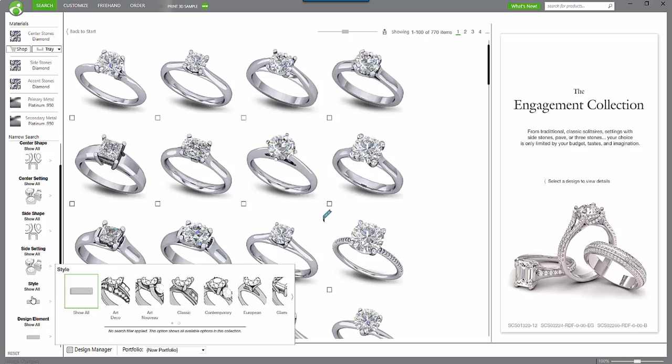Okay, so first of all, we're going to go to the engagement ring section. I want to go down to the styles, and I'm going to select a vintage style. I'm going to select this guy here. As you can see with this particular piece, we've got quite a busy looking piece, pretty much encrusted in diamonds, which is a really good example to show.

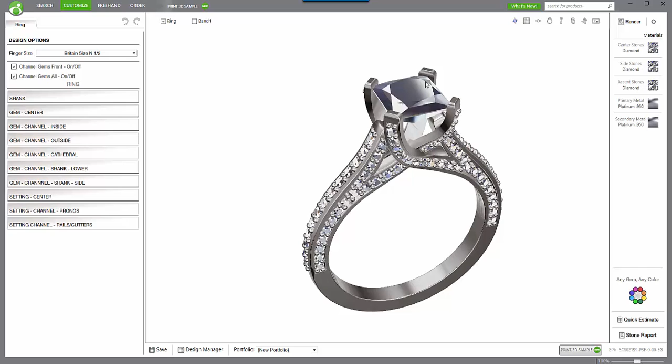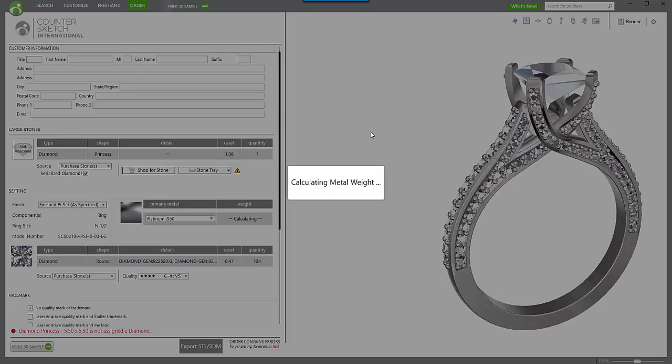You can also see that we have these claws holding the center stone in, and what I'm going to do now is go to my order button, and we're going to export this particular piece. Once it's finished calculating the metal weight, then we'll move on to selecting the particular options we want in order to export this piece out.

So we're going to click on the Export STL 3DM button. The window that comes up is going to give us all of our options here. I'm going to select Extend Prongs. That's going to be pretty important. So it's going to prepare the design there.

And when we just move the design around a little bit, you can see that what it's done is extended all of these prongs around these small stones here, which is obviously fairly important. You want a little bit of meat there when it comes to setting all of those small stones.

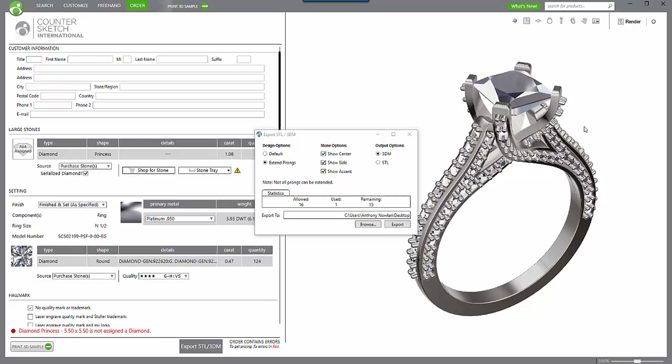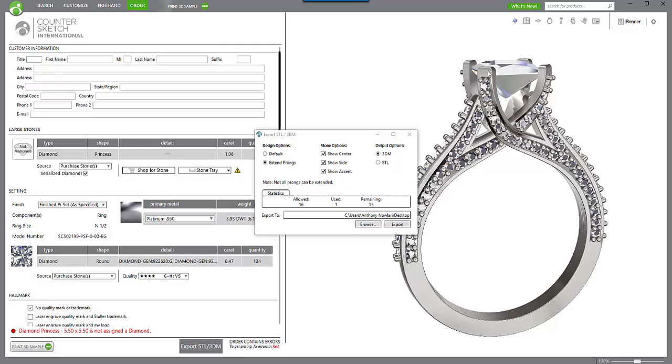But what it hasn't done is actually extend these claws around the center stone, and that's pretty important. The reason it hasn't done that is it sees these particular areas as actually part of the ring, not claws themselves. So this is a perfect example of when you'd need to go into a software program like Matrix and extend these manually, which is what we're going to do now.

We're also going to select all of our stone options, so we want to check all of these boxes here. For this particular option, I'm going to select the 3DM option because we are going to be doing a little bit more work to it than what we would normally do. Once we hit browse, we're going to browse where we want the file to go to, and we're going to hit export from there.

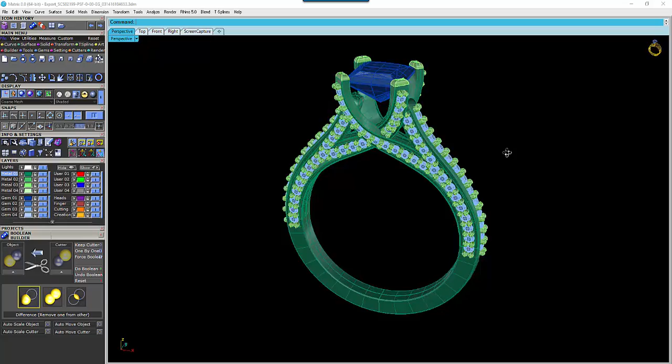Now that we've opened up Matrix, you can see that our file is here, all ready to go. What we're going to do first is make sure that the ring itself is ready to be booleaned together. Now, a boolean operation is when you cut or join or get the intersecting pieces of any particular two or more poly surfaces, and that's what these are here.

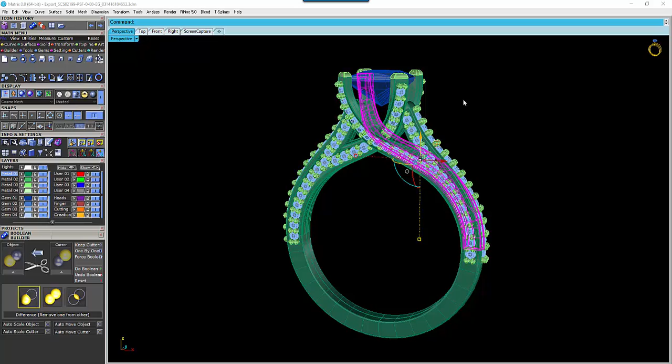When we click on each one of these, we can see that they're all individual, and this is very indicative of what happens when you export a 3DM file. The reason it's really quite handy is that if you need to do some modifications to this particular file, it's much easier to do that to a 3DM file rather than an STL. STL is generally speaking going to be one mesh, and you can't really do a lot with a mesh. Your options are really quite limited.

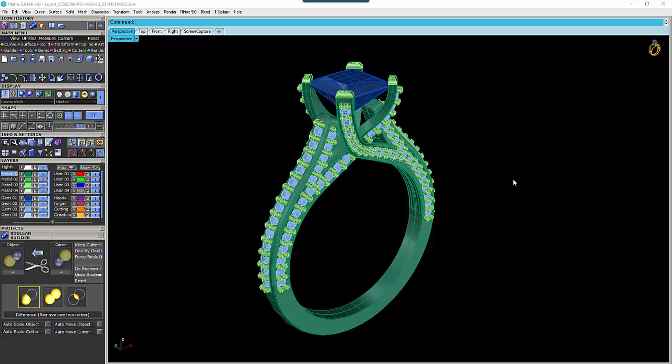So what we're going to do first is turn off all of those gems, and we're going to have a look at what the actual file is. So if we select all of these guys here and pop them into the object window, we're going to get this window here saying some of the objects are not valid. So we need to have a look at that and see what's going on there.

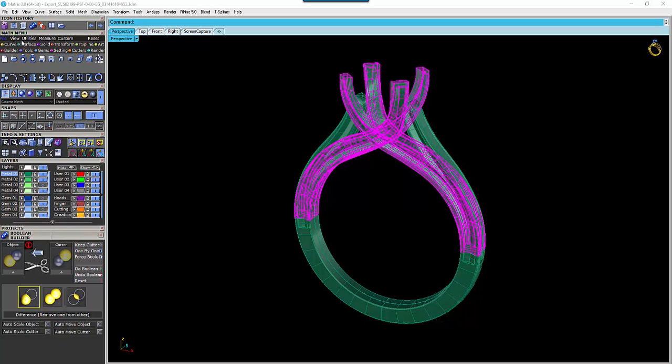I'm going to go to the Utilities menu and select Show Edges, and we can see here that we've got some naked edges. Nothing really unusual with 3DM files, most files do have those at some stage or another. So to fix those, it's really pretty easy. We're going to hit Join Two Naked Edges and just select the edges here.

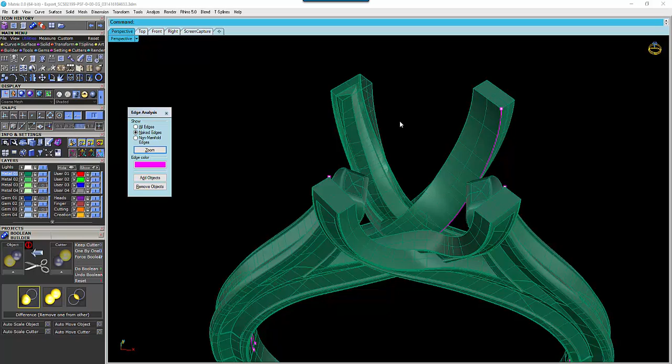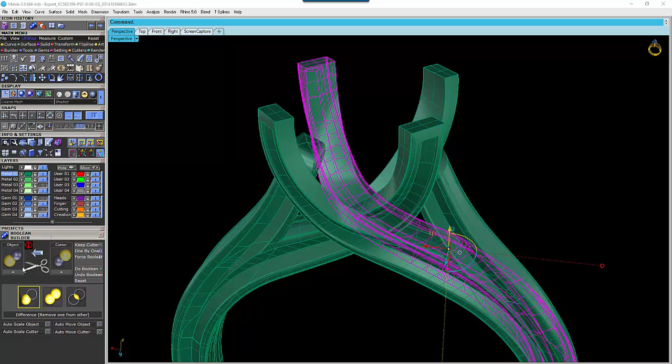This here is just a shading anomaly, so we can just select all of that, hit explode, and then hit join again, and that's all good to go. So now when we put those in there, we're going to get the green tick of approval, which is great.

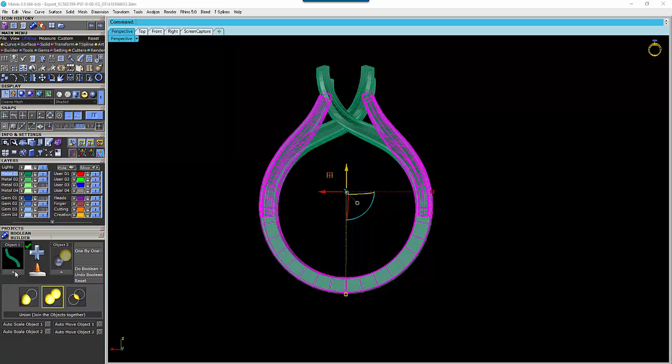The next thing we want to do is make sure that these are all joined together. So we're going to move across to our Boolean difference, Boolean union. We're going to select those two there, put them into that object window, and select these four here into that object window, one by one.

Force Boolean and Boolean those all together. Okay, so once that operation has finished, which took about a minute, that's all one solid piece ready to go.

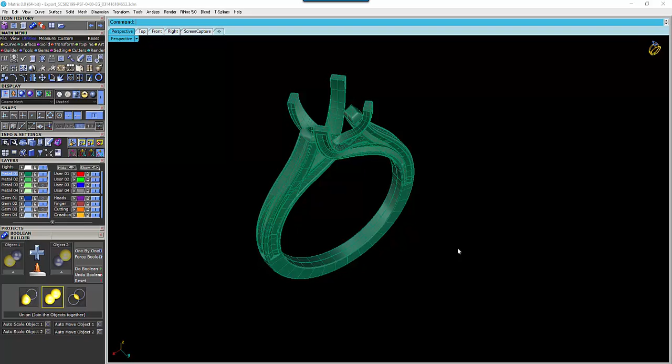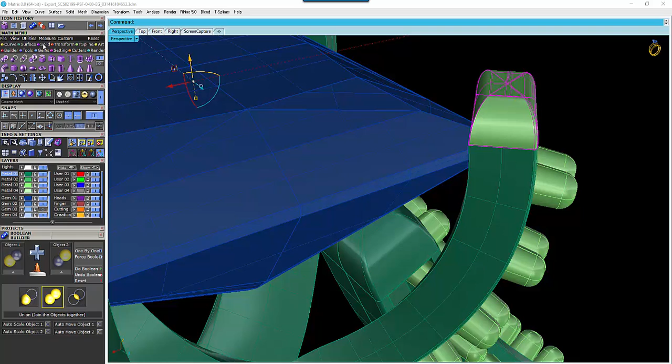Let's bring back all of our prongs and our claws. First thing we need to do is, when we bring back that center stone, we can see that we've got to extend these claws up a little bit. So we're going to select each one of those, and we can see here that they are not capped. So we're going to cap those by going into Solid, Cap Planar.

Now that they're capped, we're going to go into the appropriate window there, and use a tool called Transform, Scale 1D, select an area, and just scale that up. We're going to extend it up to however much meat we really want on those claws there, so just taking those down a touch.

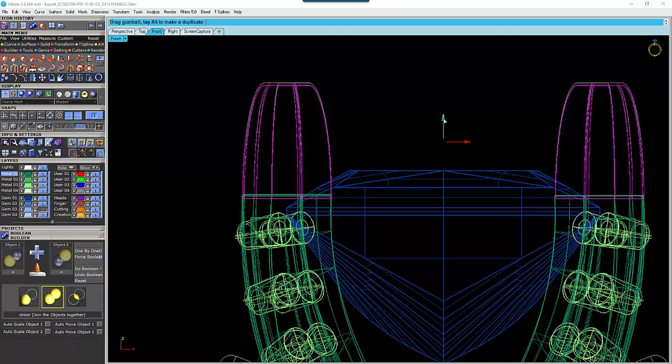Next thing we do is we're going to join all of those particular pieces to the dark green pieces there. So again, we're going to select all of those pieces and pop them into object window 2, the dark green section there into object window 1, and hit Do Boolean.

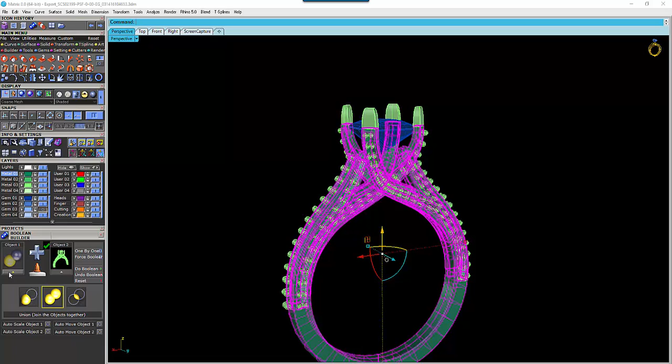This is an operation that should take around 4 or 5 minutes, depending on the speed of your computer. My computer's pretty old by today's standards, so it should take about 5 minutes, but a newer processor might only take maybe 2 or 3.

Okay, so that's all completed. That took about 4.5 minutes to do.

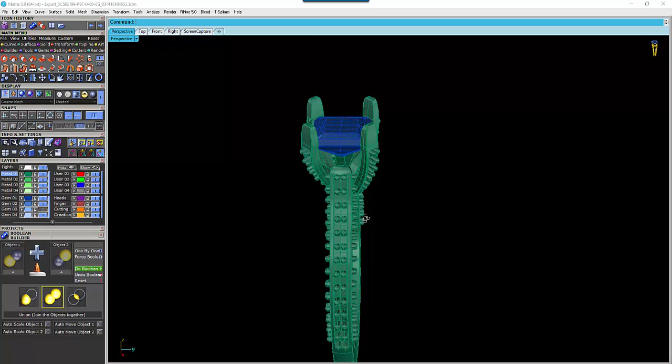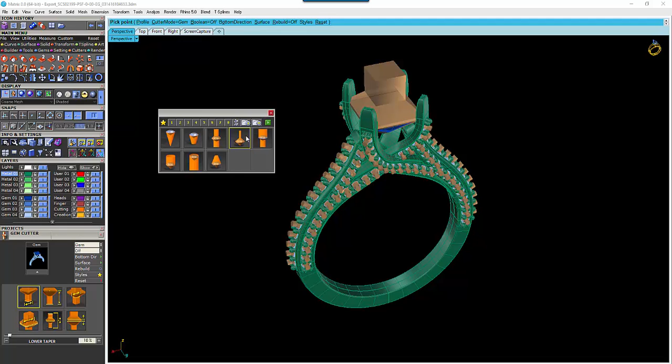Now let's just say we wanted to cut all of the seats for those gemstones. Again, it's just a case of selecting the gems, going to the gem cutter, selecting the gem cutter that we want, and then Boolean differencing those cutters away.

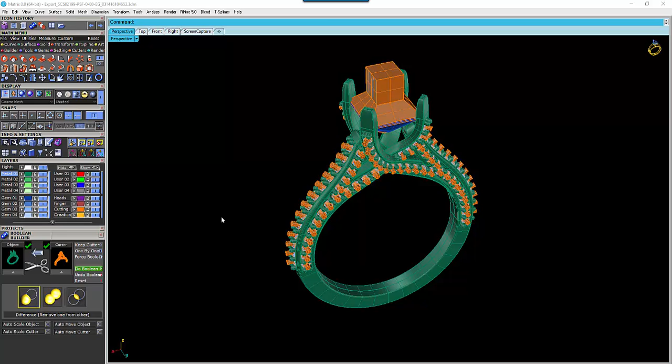From this guy here, and then we'll have our finished piece, which will look like that. I also managed to put in an under bezel there, just for a little bit more stability, but when we hide those gemstones, you can see here that everything's all cut out, ready to be accepted for our gems.

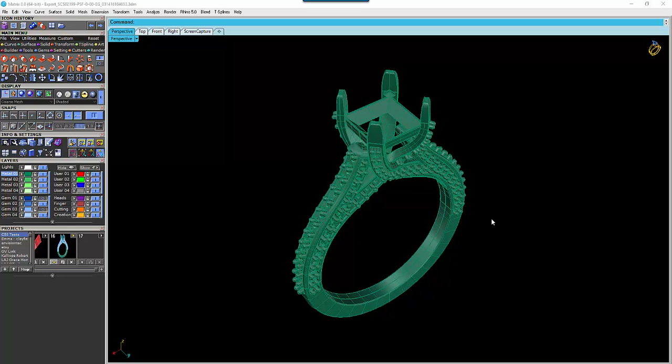The total amount of time that particular piece took was about 12 minutes, once we had Booleaned everything together and Boolean differenced all of those cutters away. Certainly not worth $80 in my opinion, but you know, you pay what you like.